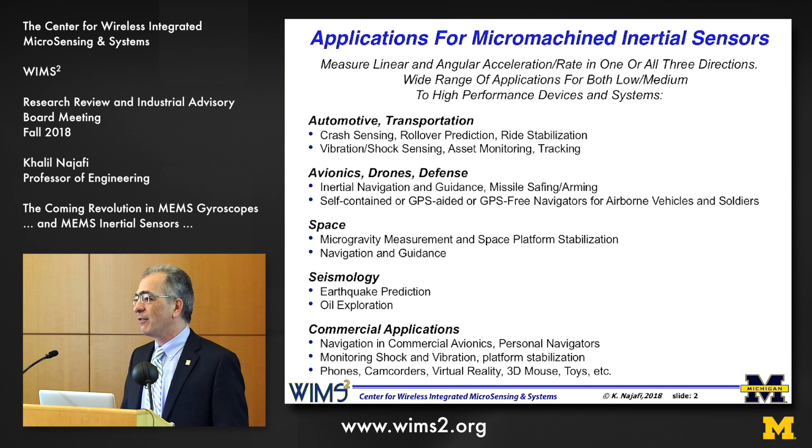There are a lot of applications in avionics, aerospace, drones, of course, nowadays, defense, space, and increasingly in commercial and consumer electronics. And again, the cell phone or video games and so forth is a very good example. But there is very heightened interest recently over the past few years in high-performance gyroscopes in particular for applications in autonomous systems, whether it's autonomous cars or drones, in augmented reality, virtual reality, and some of these other types of consumer electronic systems. And as I said, the performance that you get now in your cell phones with your inertial devices is nearly not enough for some of these new and emerging applications.

So again, already motion sensors, inertial sensors are in all kinds of devices. But what we need to do is to sort of see whether we can get the performance of the current devices, almost in the same form factor and similar cost, improved by perhaps an order of magnitude or maybe 4 orders of magnitude in some applications.

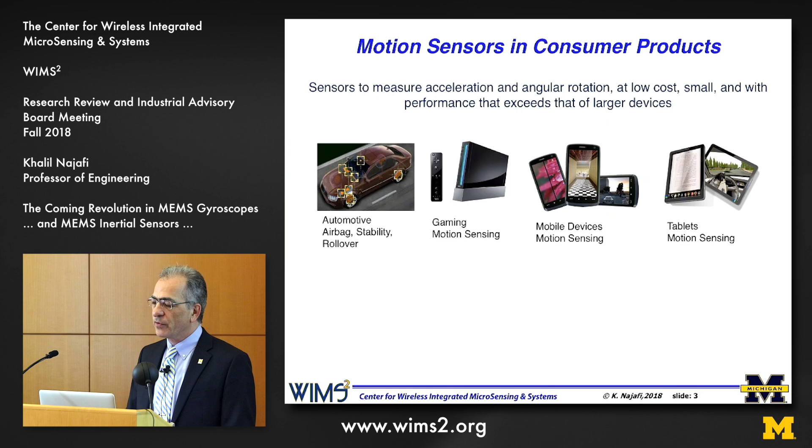So just for those of you, again, I've used the term gyroscope already. Sometimes they're referred to as angular rate sensors, essentially to measure rotation or rotation rate. And sometimes some of you are more familiar maybe with things like yaw rate or pitch and roll. So if you look at an airplane, yaw is just rotation left to right, and roll is left to right, up and down, and pitch, of course, the tip and the tail kind of pitching up and down. So what you want to do is you want to measure rotation rate and or rotation angle.

As Yogesh mentioned, just as a reference point, the Earth rotates at 15 degrees per hour. And the gyroscopes, angular rate sensors that you use in your cell phones, they're accurate to perhaps 400, 500, 1,000 degrees per hour, in that range of several hundred degrees per hour. So what you have in your cell phones is not quite there to enable you to measure angular rotation or rotation rate of the Earth.

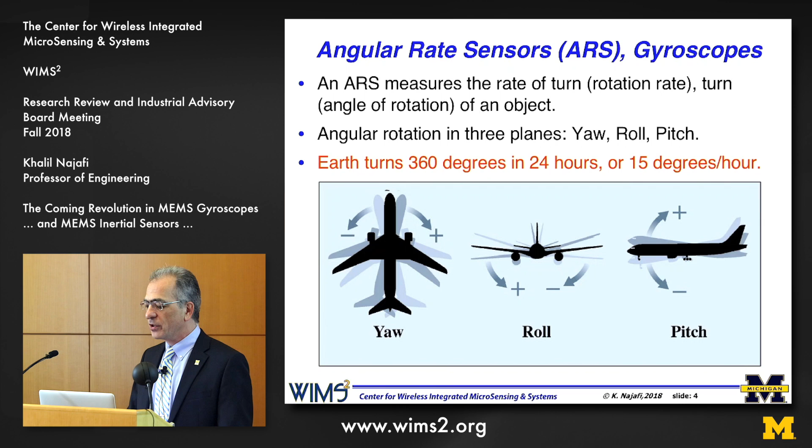As I said, there are many, many applications. I just want to put up this chart to highlight two things. This is bandwidth versus performance, for example, for an angular rate sensor, and the performance here is in degrees per second.

Applications, whether it's platform stabilization in your cameras, video cameras and so forth, in automotive environment, head-mounted displays, VR, AR, and so forth. But the thing is, there's a lot of interest really way down here: performance that's much better in terms of accuracy and resolution than a degree per hour with reasonable bandwidth. I'm going to come back and talk about applications in much more detail a little bit later.

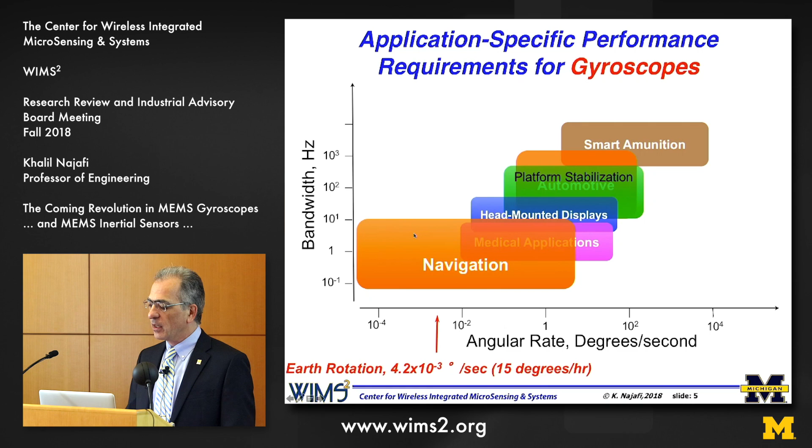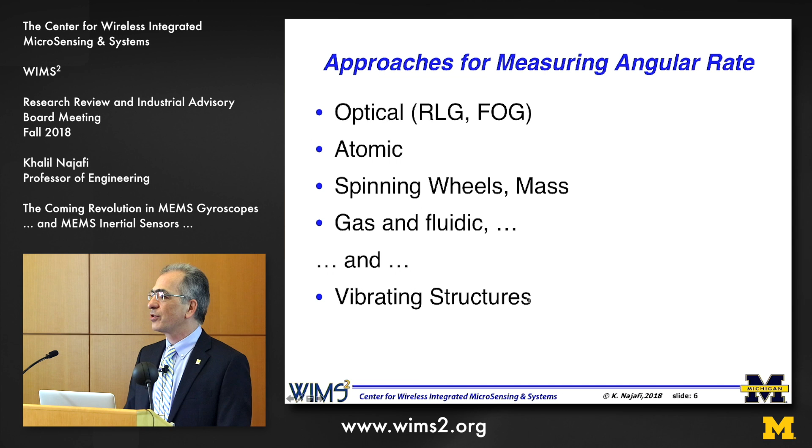Now, gyroscopes and angular rate sensors have been around for a long time. As I said, they have been used in the aerospace industry. There are optical gyroscopes you can go and buy for anywhere from several $1,000s a piece to maybe more than $100,000 a piece. Atomic-based gyroscopes that are super duper accurate, spinning wheels and masses and so forth. But in the MEMS domain, mechanical devices, vibrating structures that can mechanically vibrate and move, really have been the workhorse and the best mechanism to sense rotation.

And just very quickly, for those of you who are not familiar with how this could be done, there is a phenomenon called the Coriolis phenomenon that is used in pretty much all of these MEMS gyroscopes to measure rotation rate. This is essentially the same phenomenon used in gyroscopes in your cell phone. The idea is, if you have an object moving with some velocity, here just this ball moving with a velocity v, and you rotate around this axis, the z-axis, you get this Coriolis acceleration or apparent Coriolis force that is perpendicular to the plane formed by the direction of the velocity of that object and the rotation axis. So you get this Coriolis force.

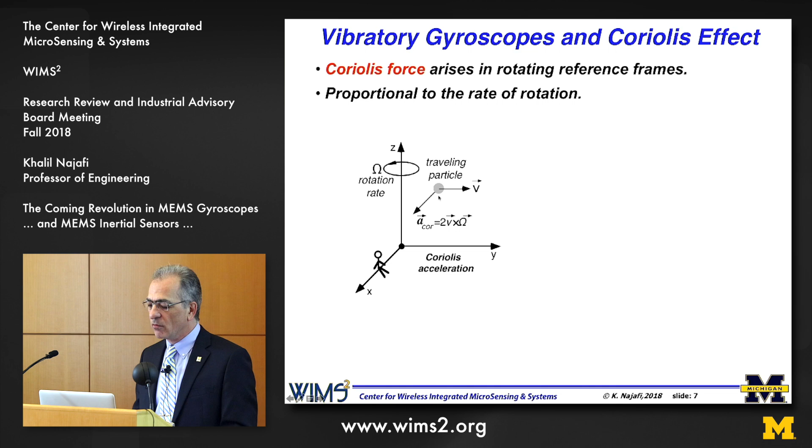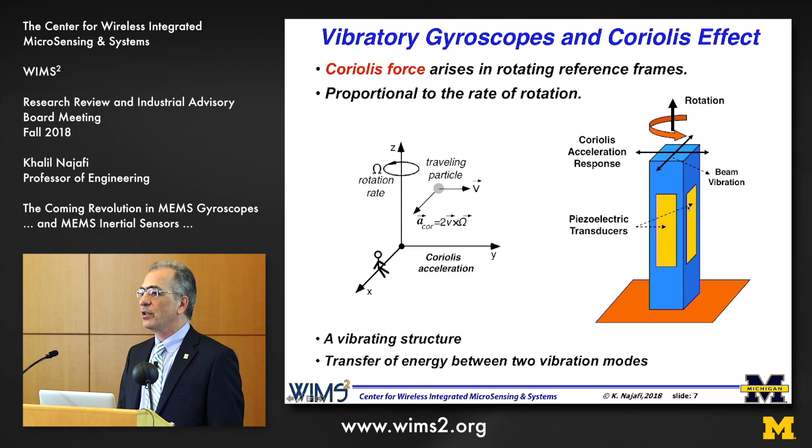So if you're sitting in that reference frame and this ball is moving essentially in one line and you rotate it around the z-axis, you see that this ball is veering off to the left or to the right. And so you can measure this phenomenon. So essentially any object that moves with some velocity is a Coriolis force sensor, or it could be used as an angular rate detector. So I'm going to talk about some of these structures, in particular some that are emerging, and some that have been used for many, many years.

Without getting into too much theoretical detail, one thing that is good to understand is, for a lot of these sensors, what is the sensor structure itself capable of measuring in terms of resolution? What is the smallest signal that this sensor can measure? For MEMS devices this is very important, because MEMS devices by definition are miniature, so you lose a lot of size, volume, mass, and so forth. The fundamental resolution limiting parameter for a lot of these angular rate sensors or gyroscopes is what's called the Brownian noise, the mechanical noise from the device itself.

This noise, which is the minimum detectable signal, is a function of a number of parameters determined by the mechanical device, this moving mass. These parameters include the mass, the size of the device, the geometry, the frequency of how fast the device moves, and how sharp that resonance is. Just like a guitar string, when you pluck it, it's a very sharp tone. The sharper that tone is, the higher the Q, and the higher the Q, the better the resolution of the device. And how much can you move this mass?

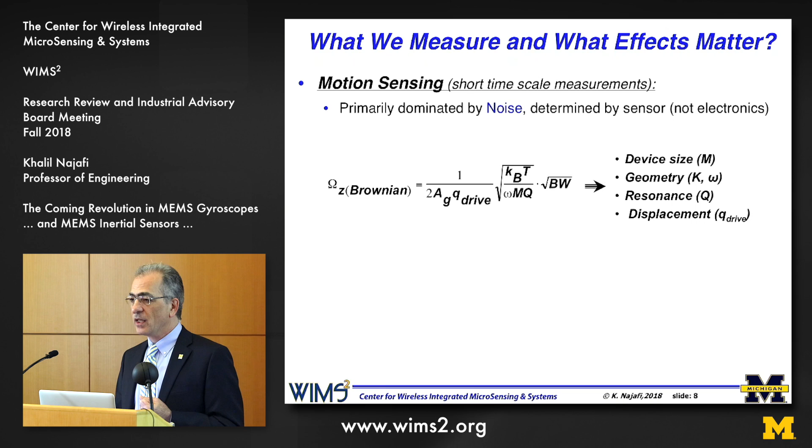As you can see, to get better devices you need large mass, large resonant frequency, a very sharp resonance quality factor, and a large displacement. Unfortunately, getting a large mass and a large displacement is not something you can do in the micro domain. So a lot of devices have to rely on getting a large Q and/or higher frequencies. You'll see that frequencies of operation are typically in the kilohertz, tens of kilohertz, hundreds of kilohertz range, because that's what you need to get the resolution. And you will also see that the quality factors are getting pushed higher and higher.

Just as another reference point, and I've shown plots similar to this in the past, if you look at the performance of MEMS gyroscopes over the past 30 years or so, it's plotted here. This is essentially the noise, what is the smallest signal that the device can sense, going anywhere from about 10,000 degrees per root hour, and nowadays down to about 10 to the minus 3 degrees per root hour. So more than 6 orders of magnitude improvement really over a span of only 30 years.

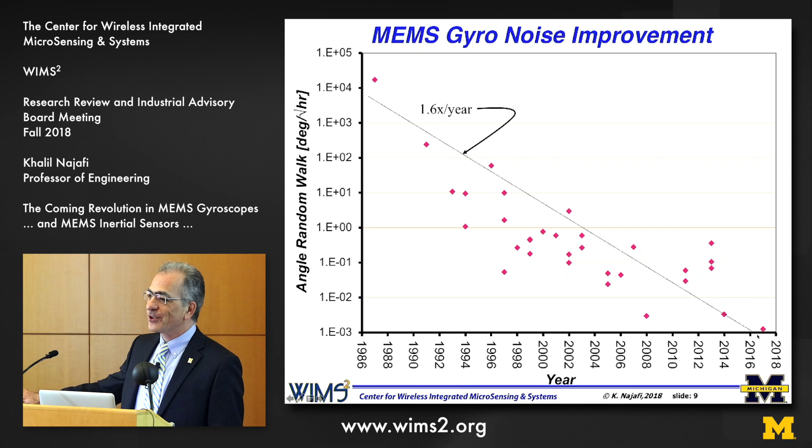And in some ways, I've sometimes said this, that we actually beat Moore's law. We are improving at 1.6 times per year, which is better than Moore's law has done. Now, of course, there's scatter around, and as you get down closer to the limits, of course, making and keeping up that improvement is harder.

So Yogesh asked me to talk about sort of this coming revolution. I call it the ongoing revolution for gyroscopes. I won't be able to get through all of the details, but what I like to just point out as I go through my presentation is focus on really all of the different key areas, especially for inertial sensors, that many groups around the world and companies are working on.

First is the sensor and the sensor structure itself, and this is where I mostly will talk about today. You need to make sensors that are low noise, that are low drift. You need many of them. They need to be small, of course, low cost. Many of them need to perhaps be integrated with electronics in order to get chips that are extremely small.

Increasingly, we will see, and we have seen, that many of these emerging systems have many sensors in them. As I said, the chip that's in your cell phone already has 6 inertial sensors, 3 accelerometers and 3 gyroscopes, all in one chip. But I suspect that we're going to see more and more of these sensors integrated on the same chip, and this is essentially to make these devices more accurate, as Yogesh mentioned, for example, for the hydrophone array, and better, larger signal range.

Environmental control is critical to the performance of sensors. So the main reason why a lot of these sensors that you have in your cell phones can't provide better accuracy is that they are subject to temperature drift and things like that. And so there's a lot of work in developing packaging technologies that can maintain a very stable environment for the sensing element, so as the environment, whether it's pressure, shock, vibration, changes, the sensing element does not see that change in the environment. Packaging is critical.

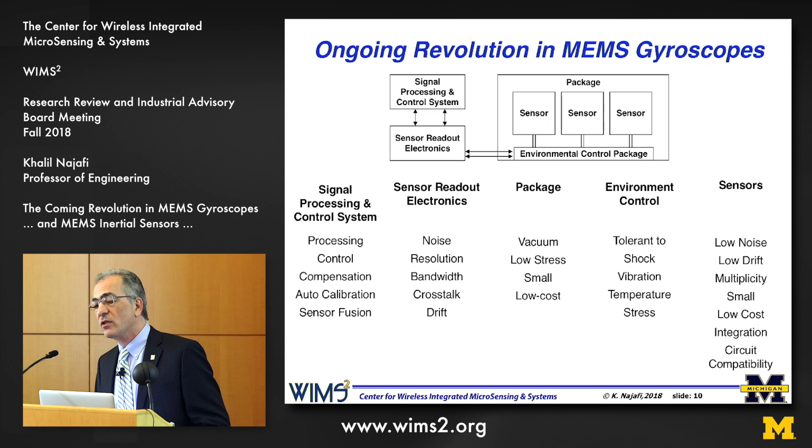And then there's further processing of the data, what we call signal processing electronics, for things like control, sensor fusion, auto calibration, and other things that are going to be more and more applied in these devices. Now, some of these devices, of course, need to be small as they go into your cell phone. Some of them need to be very highly accurate, and they don't need to be as small or maybe have as much power.

I talked about the Coriolis phenomenon. I just want to very quickly show that most of the sensors, MEMS gyroscopes in particular, that are used nowadays and you own in your cell phones, are based on really the very basic principle of a tuning fork. And all of you are familiar with the tuning fork. If you take one of these tuning forks and you hit it, you can hear it ring, it's very nice, very sharp, very specific.

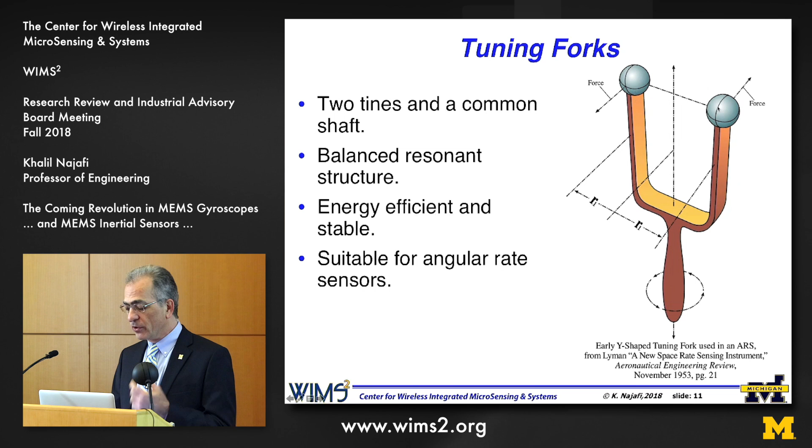And it just turns out actually a tuning fork is an excellent gyroscope. The way it works is that if you just think of this tuning fork, there's a shaft, of course, there's the two tines, and then this is a little movie.

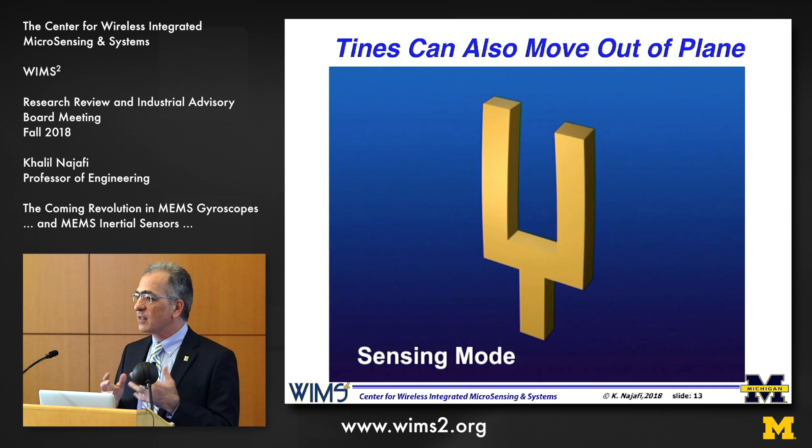If you get these two tines to move in one plane, in this case left and right, let's call that the driving mode. You're driving essentially this device into resonance. There is another mode that is called the sense mode. In this case, these tines are now moving in and out of the plane that they form, and this is a sense mode. And so you can drive them in one mode, and if you then rotate this tuning fork around its shaft, the tines of this tuning fork will begin to vibrate or resonate in the other mode. So whichever mode you drive, the opposite mode is the mode that you sense.

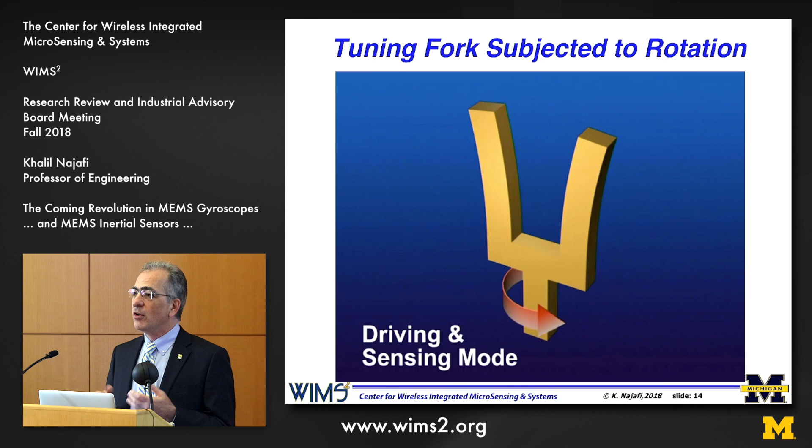And so essentially what we do in these devices is to drive these resonators in one mode, in one particular plane, rotate around one axis, and then sense the motion in the other mode. Now the problem is the Coriolis effect that you see is extremely small. So unfortunately, we're always dealing with extremely small signals and extremely small devices.

I thought it would be good to show one of the first and probably the most commercially successful high-performance gyros. This was work that came out of Draper Labs. This shows essentially a tuning fork. You see two squares. These two squares are resonated in the plane of the substrate, left and right, in anti-phase. And then if you now rotate the plane of the device around this axis, these two big squares will basically move in and out of the plane of the substrate, and you can sense that motion.

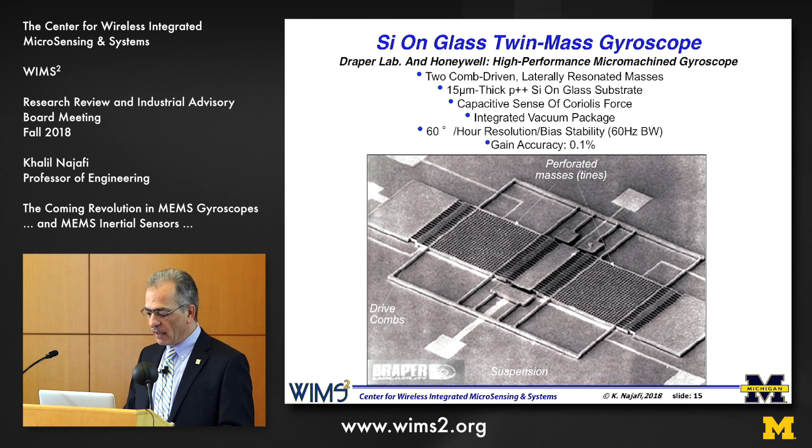So this tuning fork was the basis for the gyroscope that nowadays is sold by Honeywell and a few other companies. Now here you only have two tines. If you remember, I mentioned that one of the very important parameters you need in order to get high performance for these devices is a high quality factor, a very sharp resonance. The devices in your cell phones have a quality factor of about 10, maybe 100. That's partly why, because they're small and they have low Q, they can't operate very well.

Professor Andrei Shkel at the University of California, Irvine has one of the largest and best programs on inertial sensors. There are a few slides from him. One device that his group calls the quad mass gyroscope, or the QMG, takes this tuning fork idea to the limit in order to improve quality factor. In this case, you have four masses, and in this little movie you can see that each of these pairs of masses moves in opposite directions, all in order to balance out and minimize the loss of energy, and as a result increase the quality factor.

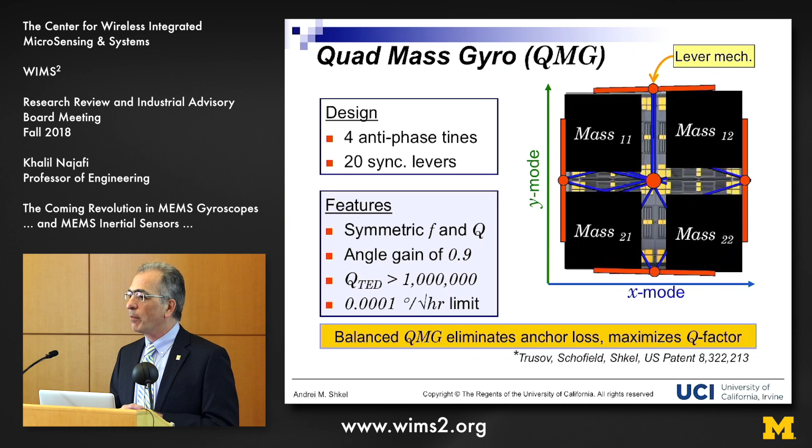So in this case, for example, this would be the drive motion, and if you now turn this gyroscope around the axis into the plane of the slide, these masses will begin to move in the opposite direction. So one drive, one sense mode, and with these four masses the quality factor can increase by orders of magnitude. His group has shown that the quality factor could be as high as about 2 million at frequencies around a couple of kilohertz. With this device, he's demonstrated performance on the order of about 0.09 degree per hour bias stability.

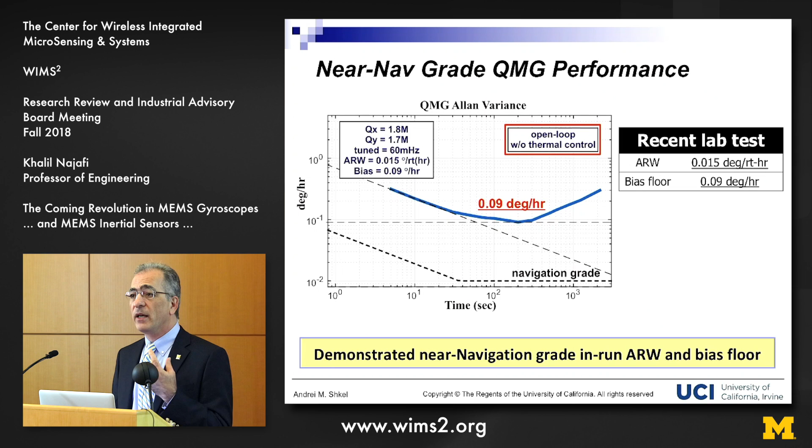Let me go back to this slide because I didn't mention size. We're talking about a very flat device that's only 50 microns thick and measures only a couple of millimeters on a side, that can provide stability on the order of about 0.09 degrees per hour. Again, as a reminder, the Earth rotates at 15 degrees per hour. So progress is just amazing.

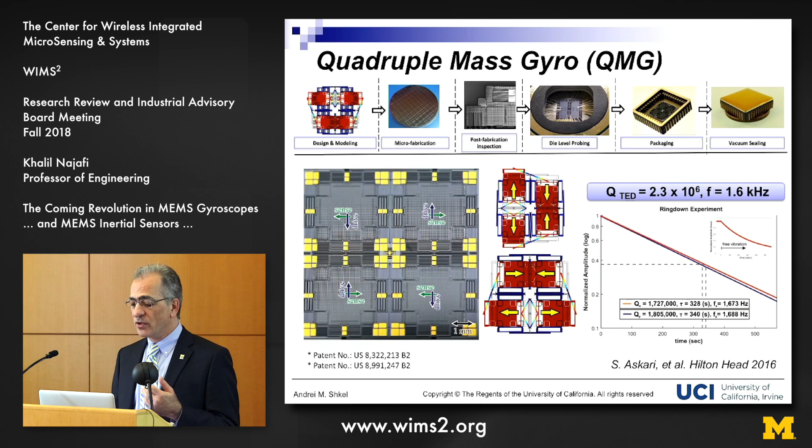All it is is a wine glass, and this wine glass can be set into motion. It could be resonated, just like when you hit a wine glass, you can hear it. That is essentially the resonance. And the amazing thing about this device is that it has a quality factor on the order of about 30 million, and a performance that's much better than 1 millidegree per hour in terms of bias stability, and resolution approaches 10 to the minus 6 degrees per root hour. So performance is amazing, and the size is only about 3-4 centimeters on a side.

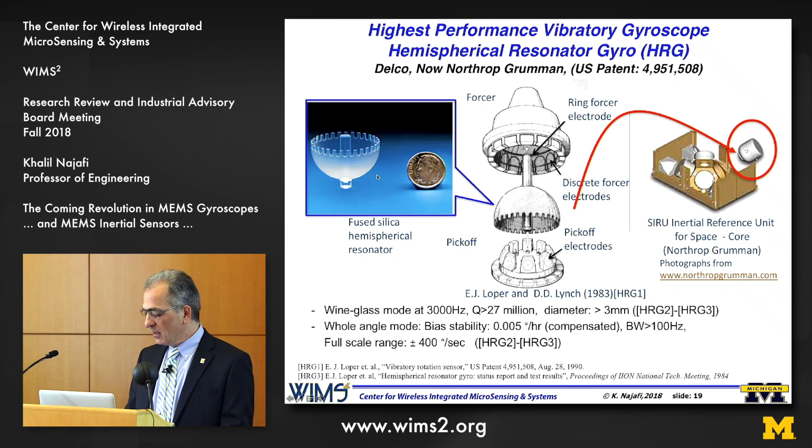So again, the important thing is, can we make these devices even smaller? So this basic idea of using non-rectangular shapes, so the tuning forks that I showed you were basically just tines, but we can use non-rectangular shapes, circles, discs, eventually 3D shells to sense motion. And it turns out that actually these shells are nothing more than maybe a more sophisticated tuning fork.

For example, for the wine glass, if this is the rim of the wine glass, when you set it in motion, the wine glass rim is going to vibrate up and down and left and right. And it just turns out that these are essentially the two modes of resonance for this device. Now, if you rotate the wine glass around its stem, essentially this vibration pattern will follow that rotation rate. And so by monitoring the vibration pattern, you can measure rotation angle.

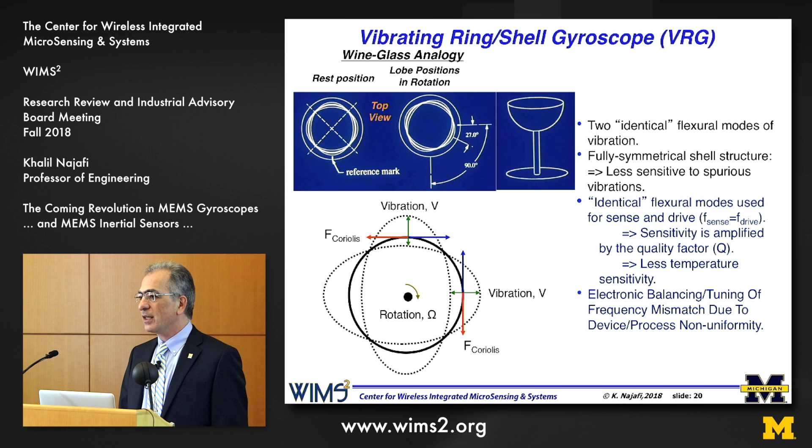Now, it turns out that you don't need to have a wine glass to do this. In fact, you can have a disc. And in the past few years, the group of Professor Farrokh Ayazi at Georgia Tech developed what they call the Bulk-Acoustic Wave gyro, or the BAW gyro. And all it is is a disc, about a millimeter, half a millimeter in diameter, and this disc is approximately 50 microns thick. You have electrodes around the disc, and you can just set this disc in motion, except that the operation frequency is around 1 to 2 to 10 megahertz or so.

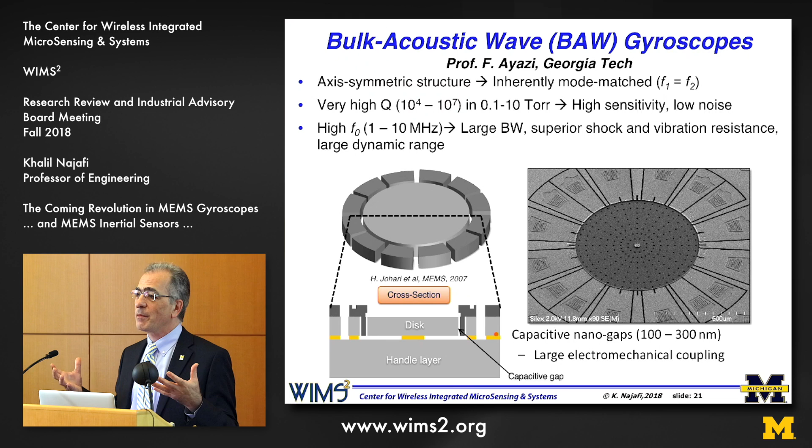But the nice thing is you can get high quality factor, but because this is now a solid disc, you can also get a performance that's much more tolerant to shock and vibration. So this shows the picture of one of these devices. The disc is in the middle, and these are all electrodes surrounding it. You can electrostatically drive this disc into motion. Again, I should mention that the motion here, we're talking about literally angstroms or maybe tens of angstroms of motion, and not microns of motion.

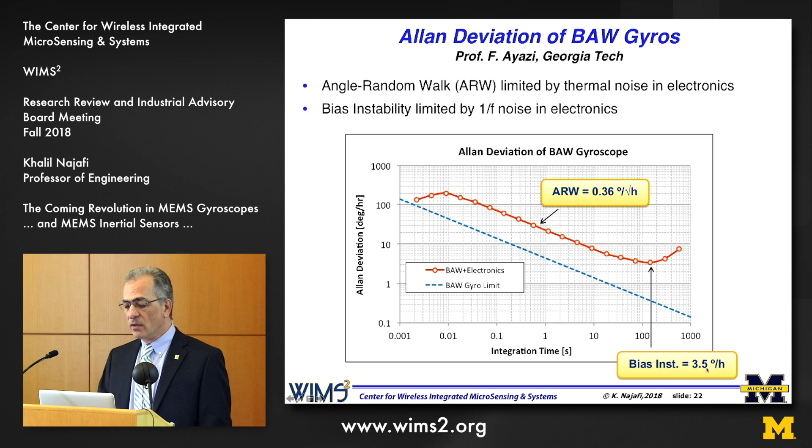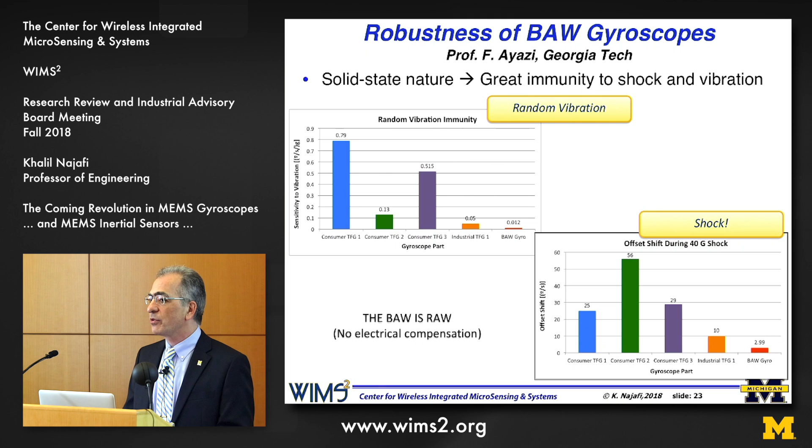Again, in this case, obviously, you don't care about shock that much. Even if you drop your phone, you're talking about maybe a few hundred G's of shock. But in many applications, there's now a need to have shock tolerance that approaches 10 to 20,000 G. And this brings me to the work that we've been doing and I've presented in the past, and that is essentially making a miniature, actual 3D kind of a wine glass shell that has high quality.

So this structure is shown here. The yellow part is a fused silica shell that is formed into literally a wine glass. In this case, we refer to this as a bird bath because the stem and the structure looks like a little bird bath that you might have in your backyard. So this device then is attached in the middle, surrounded by electrodes in order to drive it into resonance and also to sense the motion.

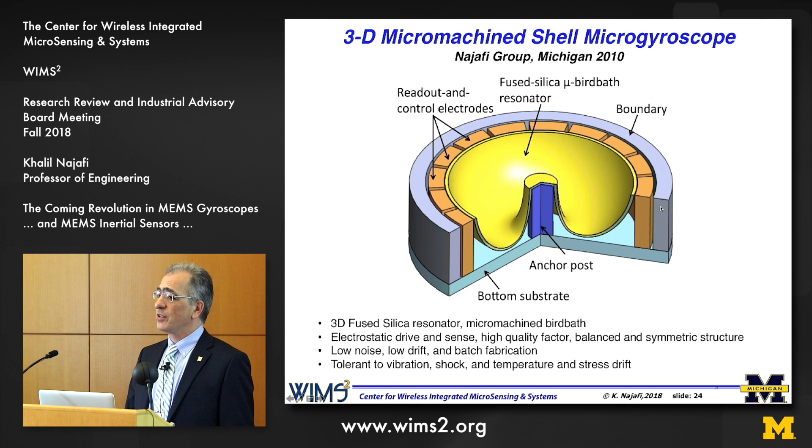Because it is made out of fused silica, it potentially could have very high quality factor. And the device size might be on the order of about 5 millimeters to maybe about a centimeter, in that range. Now, the way we make this three-dimensional shape is we basically use blowtorching, literally just like glass blowing. So we start with a very thin layer of fused silica.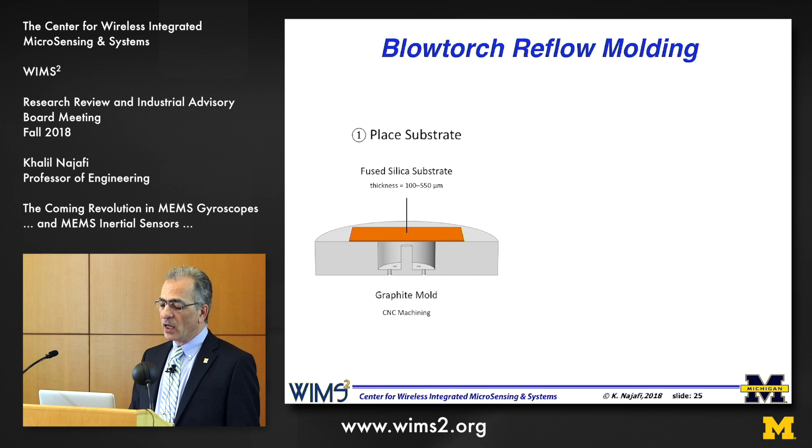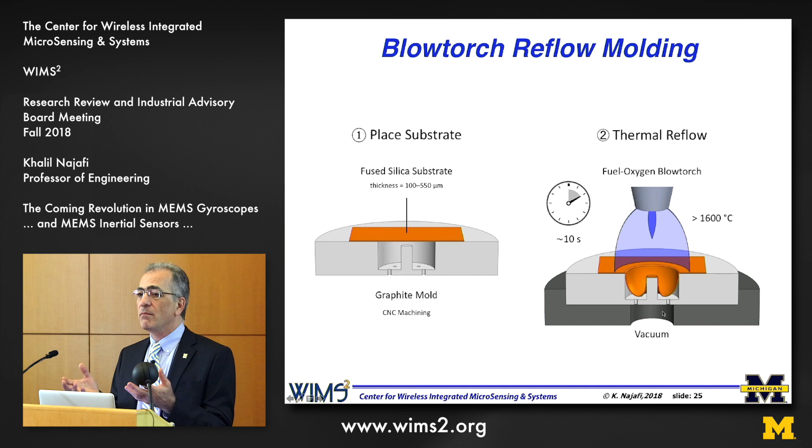Fused silica is glass, but it's very pure, does not have any contaminants or impurities in it. We put it on a mold. We bring down a blowtorch and take the temperature up to about 1600 degrees centigrade. At that point, the fused silica gets softened. It doesn't melt completely, it just softens up. And then as it softens up, it settles into that mold and it takes this shape.

So if you look at that molded part, it looks something like this. This is now fused silica, approximately 70 to 100 microns thick in most regions, and very smooth. This particular device is approximately 5 millimeters in diameter. If you look at the cross section of this device, it looks something like this. As I said, about 5 millimeters, and thickness in the range of about 70 microns or so. In fact, this can get as thin as about 15 microns in the thinnest regions.

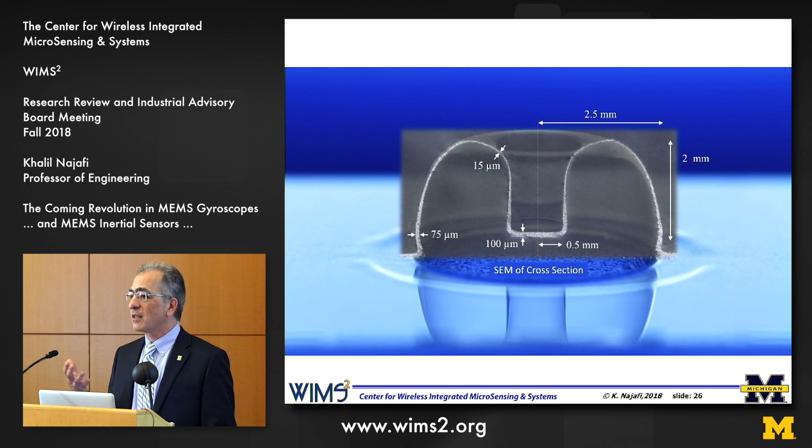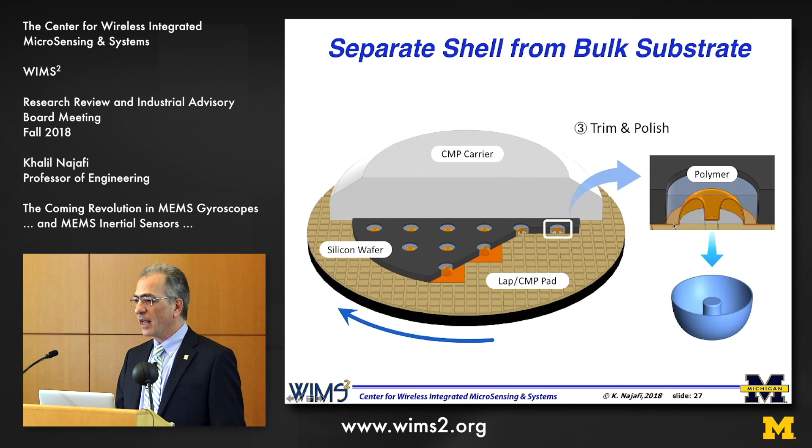Which is amazing when you think about it. Just using a blowtorch, literally using a blowtorch, you can make something that's this smooth and also this delicate and be able to handle it. But we can do that. And so what we do then, we take these parts and we just polish away that extra rim, that flange that's around the rim, and we end up with a little cup. And in fact, this little cup looks something like this, in this case about 5 millimeters across.

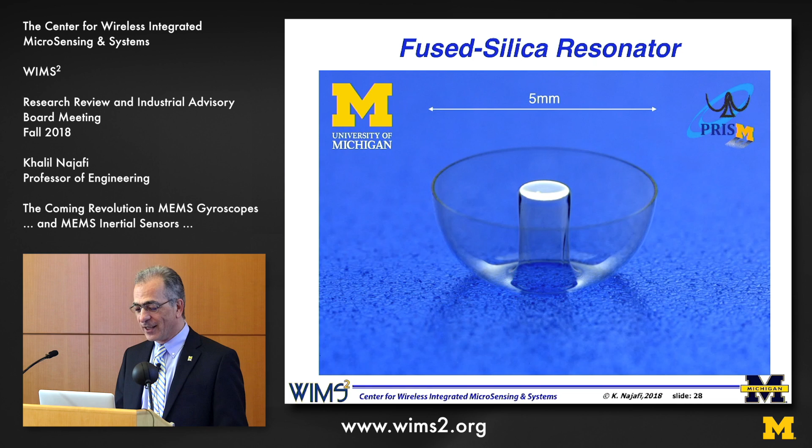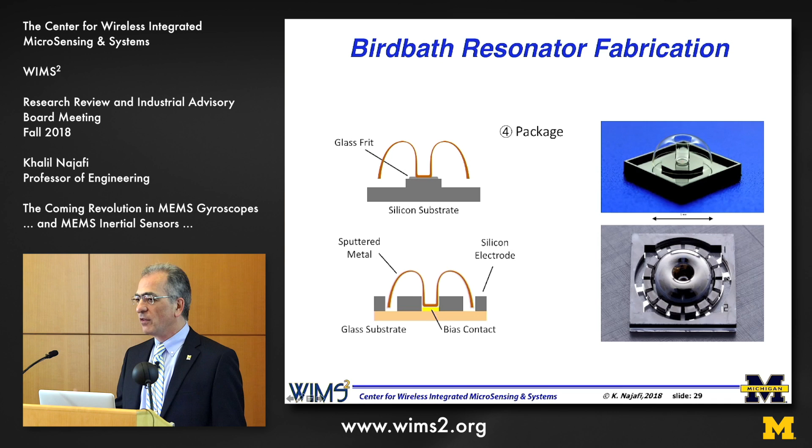It's certainly the world's smallest and probably the world's highest quality wine glass. There is no question about it, because I don't think there's a wine glass that can ring as nicely as this, as you will see in just a second. Then we mount these parts on a substrate, and then we surround them with electrodes to capacitively drive and capacitively sense the motion. You can make these in different sizes. This is about 1 centimeter in diameter, 5 millimeters in diameter, and about 3 millimeters in diameter,

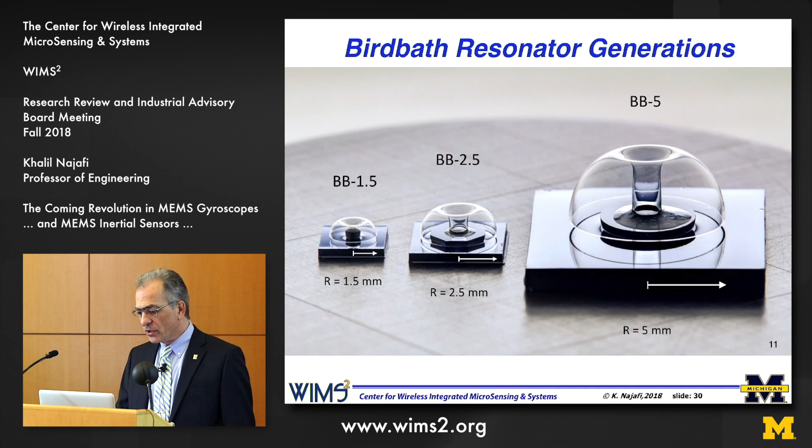but they're basically all the same principle. Now the thing is, the larger you make them, a little bit better, the higher quality factor that you can get. Remember, I showed you the HRG from Northrop Grumman, and I mentioned that with a diameter on the order of about 3, 4, or 5 centimeters, you can get quality factors approaching 20 million or higher. And so in our 10 millimeter device, we have measured quality factors that are actually not as high, but for devices this small are even more amazing. So I talked about quality factor.

The other parameter that really matters a lot is what's called the ring down time. And the ring down time, all of you know, just like your wine glass, you hit it, how long that ringing continues will tell you how good quality glass you have, right? You all do this when you go shop for crystals. So we do the same thing. We basically measure the ring down time of these little wine glasses once we get them to resonate.

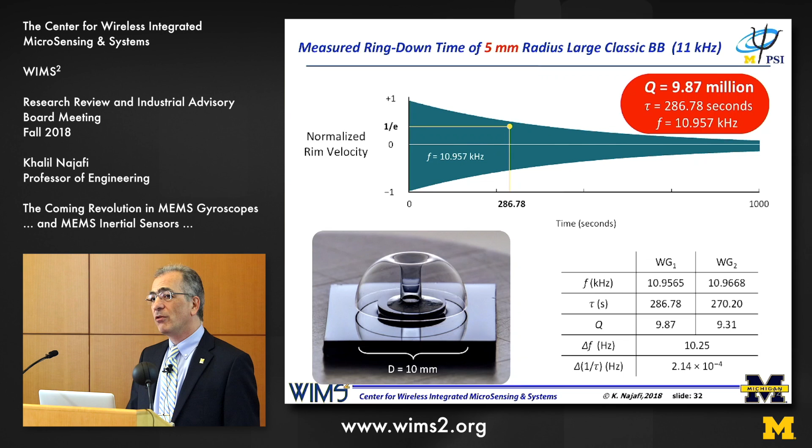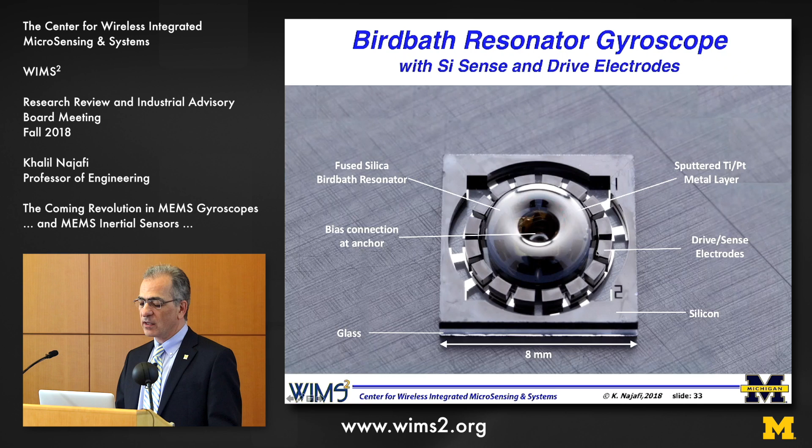Yogesh showed this picture before. So essentially you take these devices and mount them upside down. So you see essentially a donut here surrounded by electrodes, and the resonator is coated with metal, and then there's a small gap of about 30 or so microns that separates the electrodes from the resonator. And we've measured now, this is the latest measurement, bias stability on the order of about 0.01 degree per hour. And if we can make things better by another order of magnitude, eventually your cell phones can replace GPS in areas where GPS does not exist, and you can do inertial navigation.

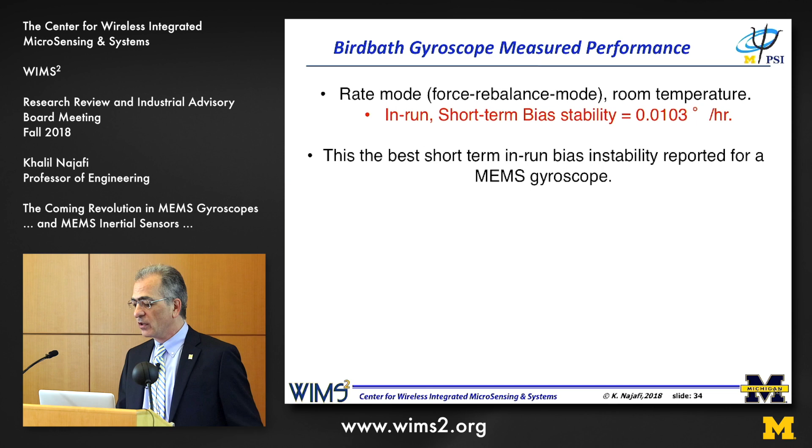So let me just say a few things and I'll try to wrap up. As I mentioned before, instead of just one sensor, you can have many sensors in these emerging systems. And multiple sensors not only give you multiple parameters, but also give you better reliability and maybe larger dynamic range. Again, this is work from Professor Ayazi's group. This is a chip that his group developed, approximately 6-7 millimeters on the side. And you can see that in this particular case, there are essentially 7 devices, but there are 3 accelerometers and 3 gyroscopes.

Now, your cell phones are multi-sensor devices. There are 3 accelerometers, there are 3 gyroscopes, but the difference between what's in your cell phone and what this device shows is performance. So the performance of the accelerometers and the gyroscopes in this chip that his group has developed is orders of magnitude better.

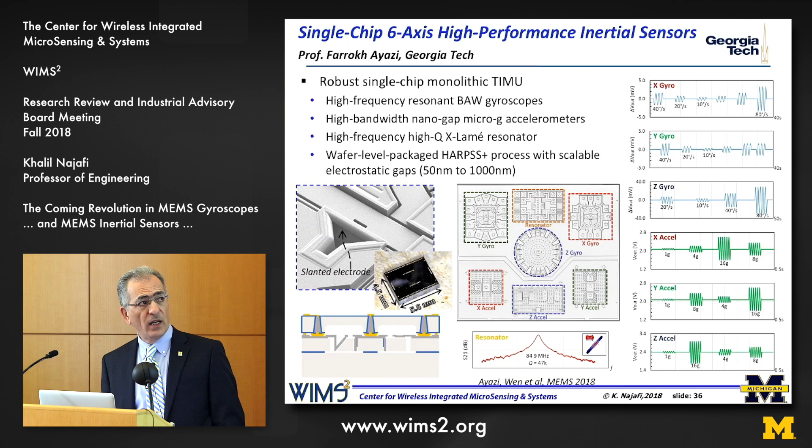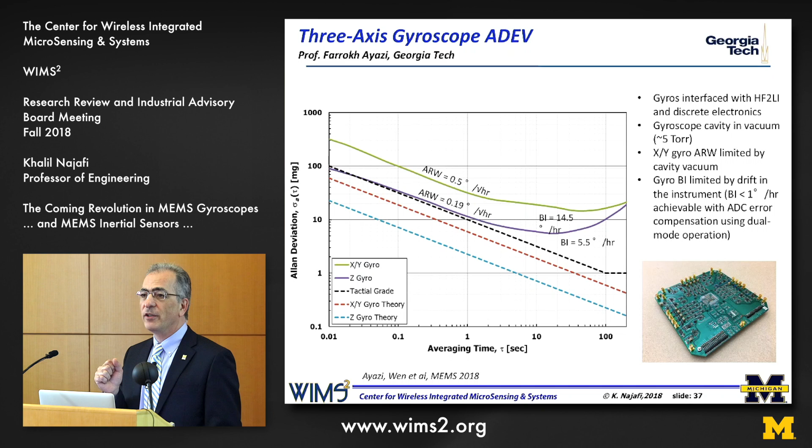So these gyroscopes can provide stability on the order of about 1 degree per hour. Your cell phone, stability on the order of about 500 degrees per hour. Accelerometers, these chips provide on the order of about 20 microG, 10 to the minus 6 G accuracy. Your cell phones, if you're lucky, about 100 milliG. So in the same chip size, by using new device structures and new technologies, you can get much better performance.

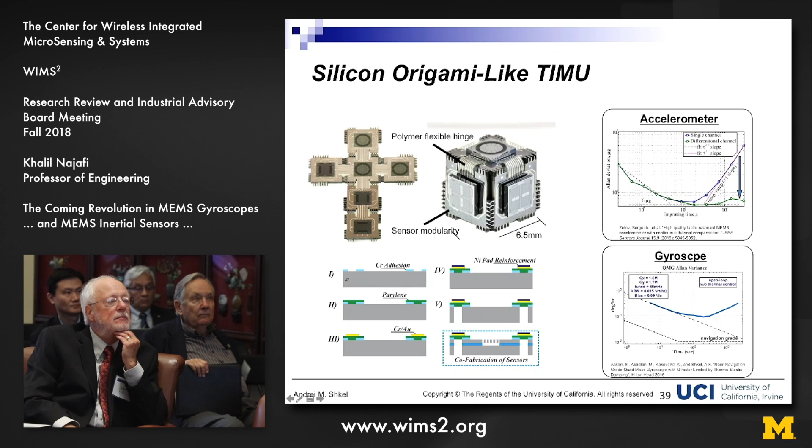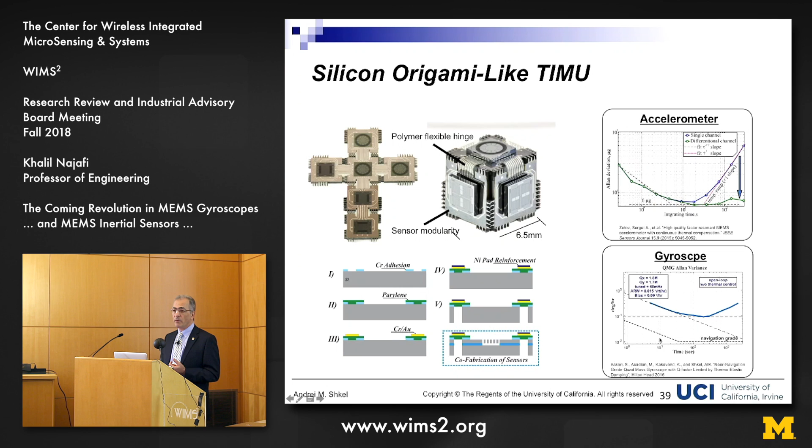Another group, Professor Andrei Shkel at University of California, Irvine, actually is taking multiple devices and mounting these on, kind of think of them as the faces of a sugar cube. Again, these are very high performance devices packed in an area of no more than about 6-7 millimeters. And accelerometers, again, performance on the order of tens of microG, and gyroscopes performance on the order of about 1 degree per hour.

I won't have time to talk about environmental control, but if you want to improve the performance another factor of 10 or maybe 20, one needs to control the environment that these sensors see. They don't want to see changing temperature, they don't want to see changing vibration, changing shock. Of course, we can't get rid of changing temperature, but what we could do is we can essentially package these devices in a controlled environment.

And that's some work that my group has done for quite some years, and that is take the sensor, mount it on a little platform, on a little heater, in its own little room, climate-controlled room, if you wish. So even though the outside temperature around the device might change, the temperature that the sensor sees is always constant. And when you do this, we've shown that you can improve performance of sensors by a factor of almost 100 in some cases.

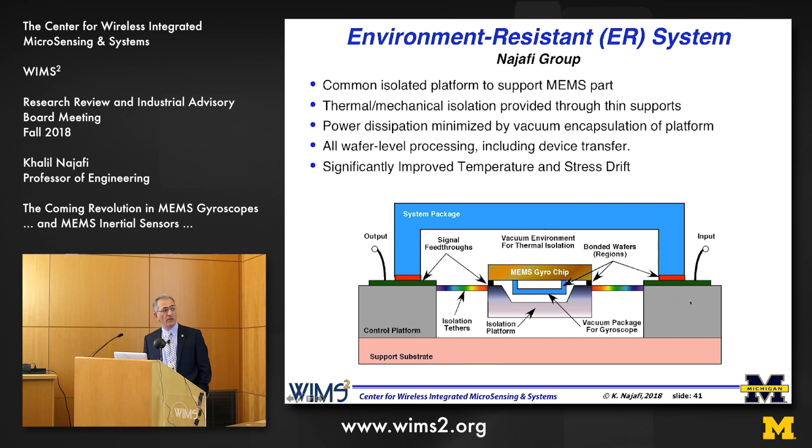In fact, we can take sensors that are in your cell phone and just ovenize them and improve performance by a factor of 100. And in fact, there's a company that came out of Michigan called EPAC that essentially commercialized this technology for use in inertial sensors and also in crystal oscillators and timing units.

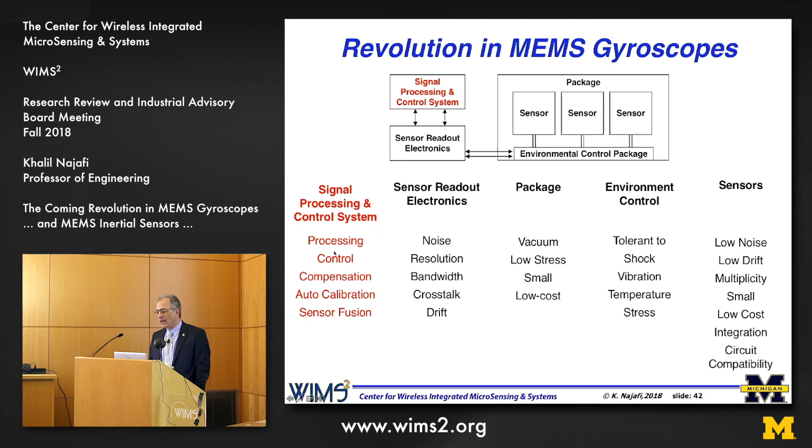Let me just say one thing about processing electronics. There's a whole lot to say, but no question that one of the ongoing activities and coming revolutions in gyroscopes and inertial sensors would be more processing electronics for processing data. And one example, again from Professor Ayazi's group at Georgia Tech, is self-calibration or auto-calibration of sensors.

So one of the reasons, of course, these sensors don't have the accuracy is that they drift over time. Now, if you could test them and calibrate them almost continuously, then you would not even worry about drift, right? You don't care if the sensor is very accurate. If it's only accurate for a day and then you can calibrate it, that's all you need. And so one of the things about these miniature devices is that you can generate mechanical signals using electronic signals, and then use those mechanical signals to calibrate your device.

So going back to the disc gyro that I mentioned from Professor Ayazi's group, if you have a disc, you can essentially have these actuators. Just think of these as 4 actuators that could be used to drive the device itself into resonance. And then you can use these signals and the sense signals that you get from the sensor itself to calibrate bias out, to improve gain control and scale factor, and to even get rid of some of the temperature sensitivities.

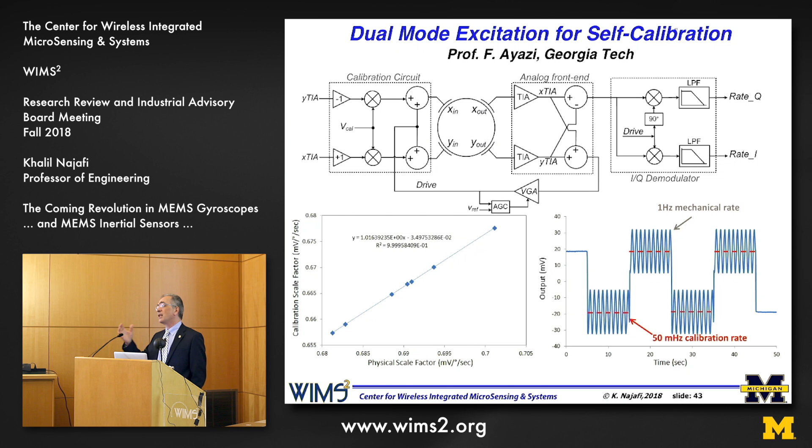And in fact, in this plot down here, without knowing the details, one thing that's interesting is you can see that this is the output of the sensor. The large signal is mechanical motion, so you're just moving the gyroscope. And this small signal is actually mechanical motion that's induced by the electronics on the chip itself, so that you can essentially superimpose additional mechanical motion and then use that mechanical motion to calibrate out the device.

And in fact, they've shown that you can take devices that are uncalibrated or calibrated only in the lab. For example, in this case, a device that might be on the order of about 20 degrees per hour. And by just doing this auto calibration, this is all electronic. You're not taking the device out of the field or out of your cell phone. It's just while it's sitting in your cell phone, you do this auto calibration and can improve the performance by almost a factor of 5.

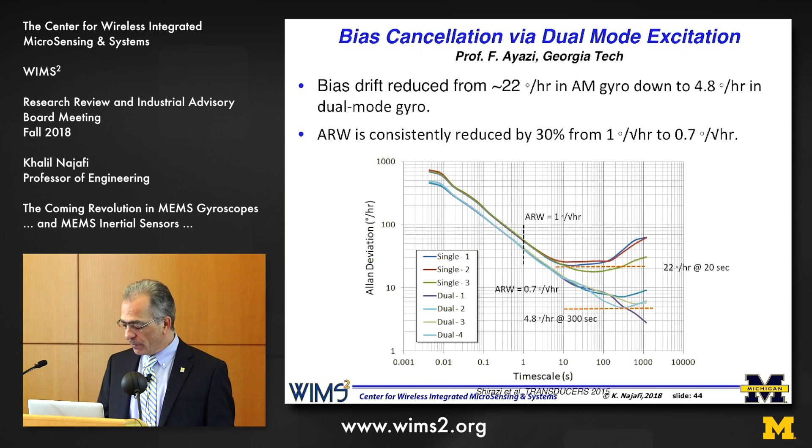And so this is another tool in your toolbox that you add in order to improve performance of these devices over time. And so this brings me to, I guess, the last couple of slides, and I'll wrap up with this: again, looking at gyroscopes and in particular performance, and performance measured in how much does this device drift, and what kind of noise does this have?

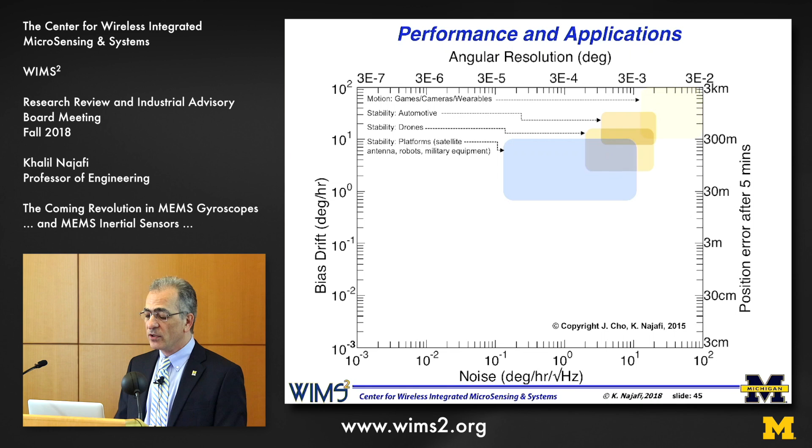And then you look at the range of applications. There are many applications, of course. I talked about consumer applications. So in most applications like cell phones and video games and so forth, you don't need the noise and the stability to be super high. There are applications in automotive, of course, emerging applications in drones, stability of platforms like in satellites and so forth, aerial surveying by drones, robots. There's a big set of applications, robotic systems for things like farming and so forth. Navigation, of course, in consumer applications.

And then oil exploration. There are a lot of autonomous systems that need better performance, and eventually really inertial navigation. That is, you only use inertial signals in order to navigate and move around and essentially sense position. So maybe you don't need GPS continuously, and in particular in environments where GPS is not available, you can continue to do navigation.

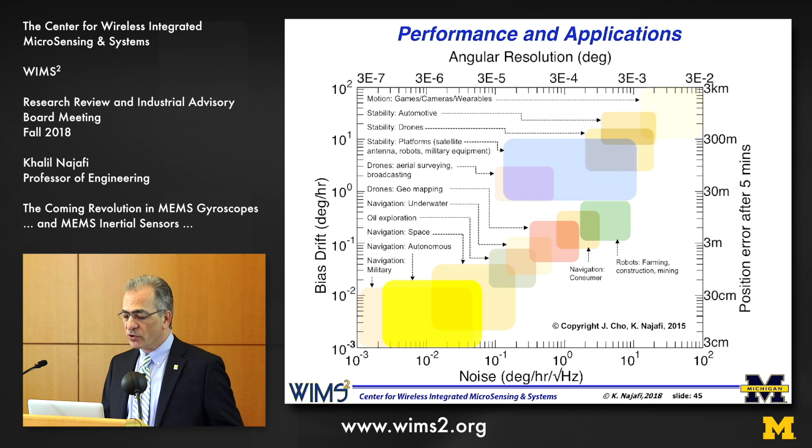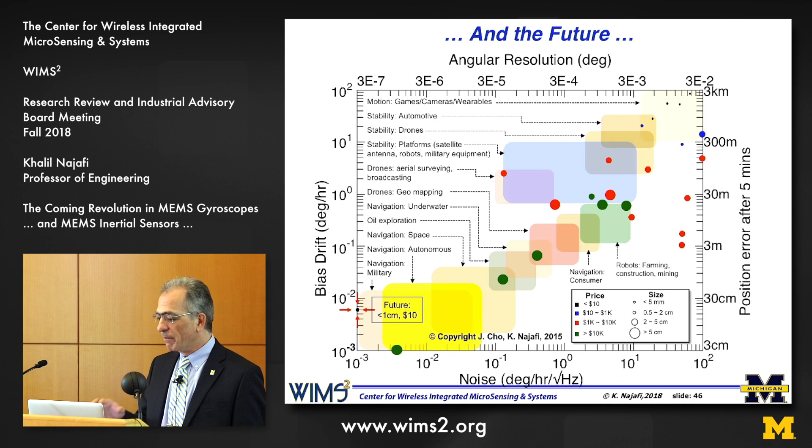Now, if you look at this plot, ideally you want to be down here in this corner, because that means low drift and low noise, and you want to have a small dot. That's really, I think, where a lot of the research effort in many places is going. That's the work that we've been doing here at Michigan, trying to get to a point where you can get performance that's about 10,000 times better than what you get in your cell phones today at about similar cost, and maybe about the same size. And if these devices become available, we're confident that many applications will emerge.

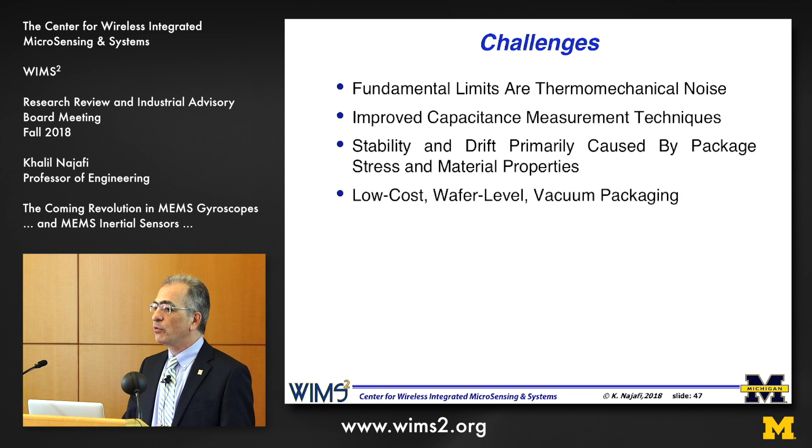So what are the challenges? Basically the same thing. We need to, of course, manage and reduce the noise, mechanical noise of these devices, readout techniques, electronic techniques, ability to control drift due to variations in things like temperature and vibration and so forth, and controlling the environment of the sensor is critical. And of course, eventually, for many of these applications, low cost and being able to produce these in high volume is critical. So with that, I thank you for your attention.

There's a lot of work that's been going on here at Michigan. Current and past students; in particular, I'd like to acknowledge a few of our current members of the group. Dr. Jae-Yoong Cho has been leading many of these efforts here at Michigan for more than 10 years. Dr. Behrouz Shiari, Jong-Kwan Woo has done a lot of work in electronics and electronic systems. Tal Nagourney did a lot of the work on the resonators, and he's been replaced by Sajal Singh, one of the current PhD students who's making these devices. Ali Darvishian on modeling, Chris Boyd on electronics. There's a constant effort going on, and without the support not only of the group but also of our sponsors, this would not have been possible.

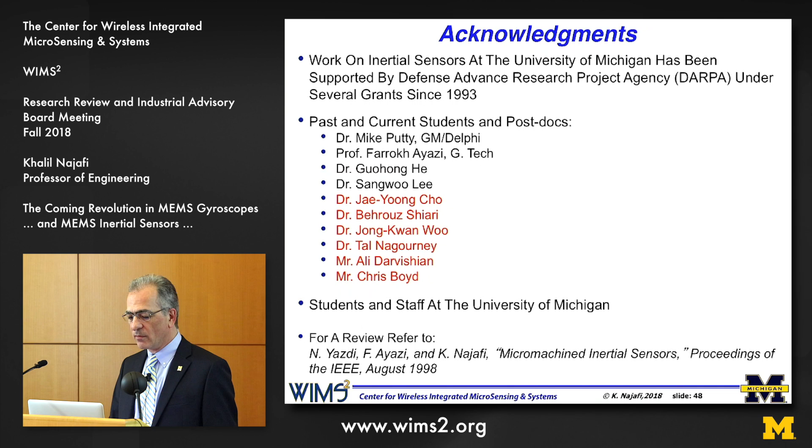I don't know if I have any more time, but I'd be happy to answer any questions if there are any.